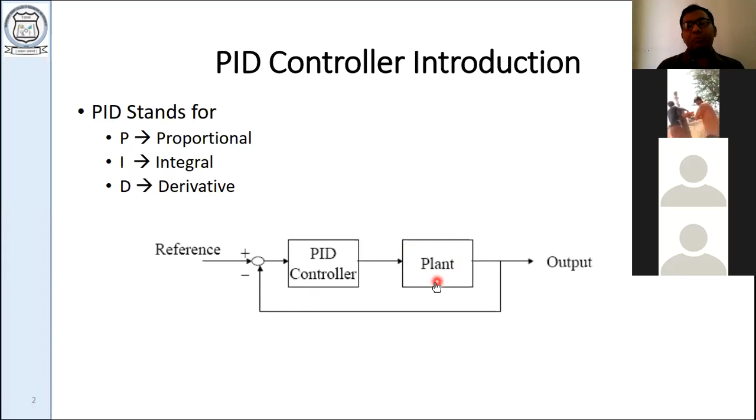And then the plant will adjust itself, or the controlled variable will be kept within the required range. This is how the basic controller works. On a similar note, PID controller will be placed before the plant, and it will try to keep the value of the controlled variable within the specified limits.

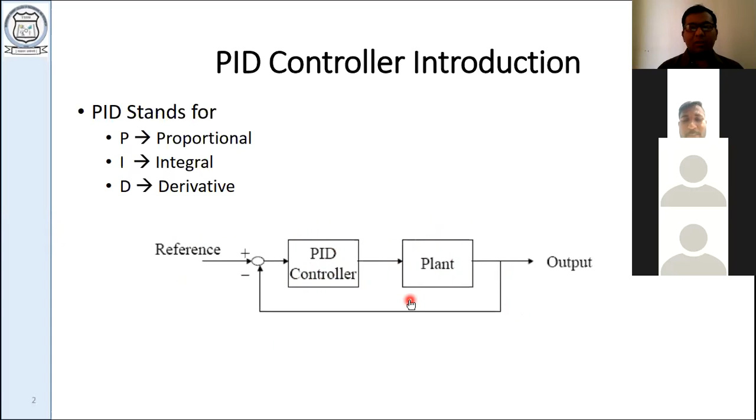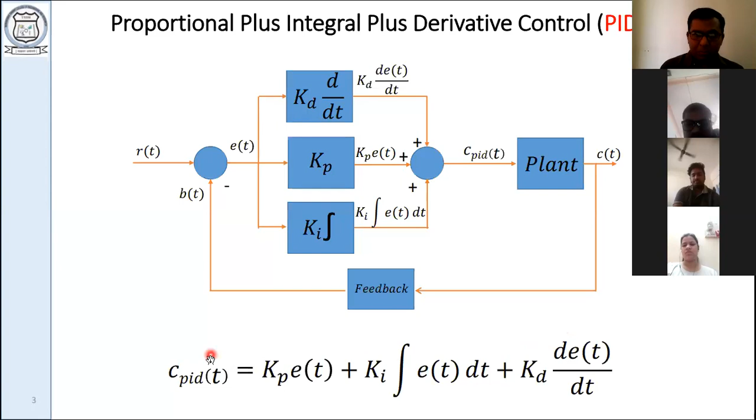Here also at the bottom you can see the output of the controller C_PID(t) is equal to Kp into e(t), which is the proportional component, plus Ki into integral of e(t) dt, which is proportional to the integration of the error, plus Kd de(t)/dt, whose output is proportional to the derivative of the error. Okay. So this is how the PID controller works, right?

Now, some of these things we will just skip ahead, because what we actually want to talk about is how the PID parameters are found out, and that is done in PID tuning, right? The process of selecting the controller parameters Kp, Ti, and Td to meet the given performance specification is known as controller tuning. A couple of methods have been proposed by Ziegler and Nichols, which suggest some rules for tuning this PID controller, and that is done experimentally.

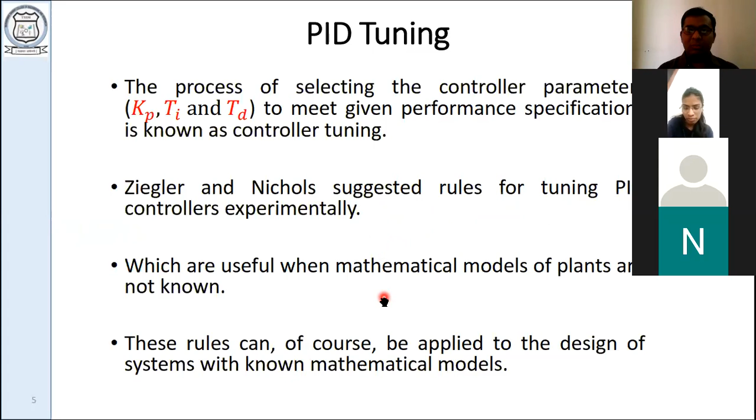That is not done analytically. Analytically means by hand or by calculations, but it is not done that way. It has to be done experimentally. So even if the mathematical model of the plant is not known, we can use these methods, and of course, if it is known, we can always use these methods, right? These will not give us final values. These will give us a good educated guess for Kp, Ti, and Td.

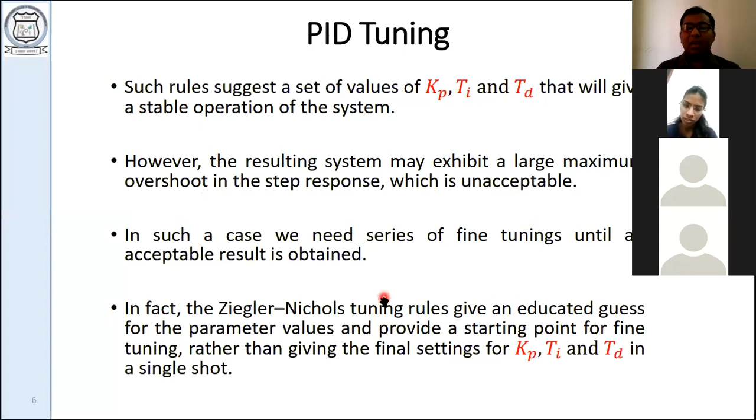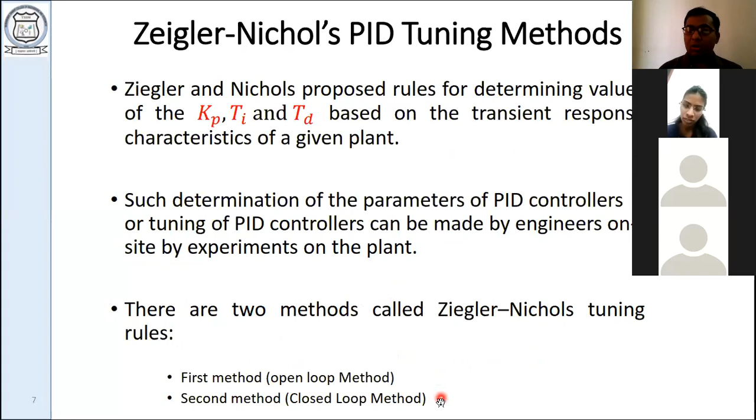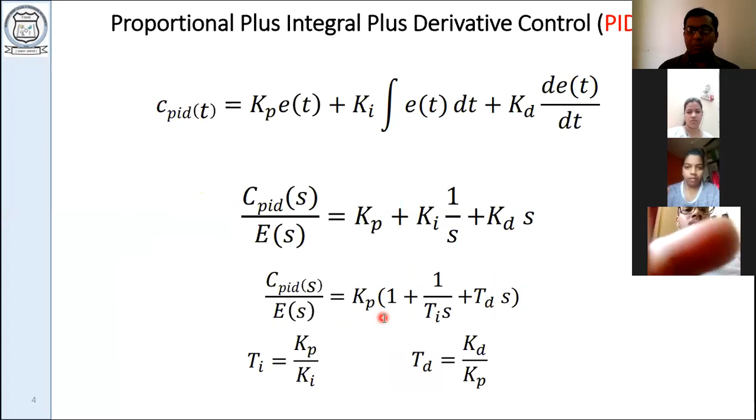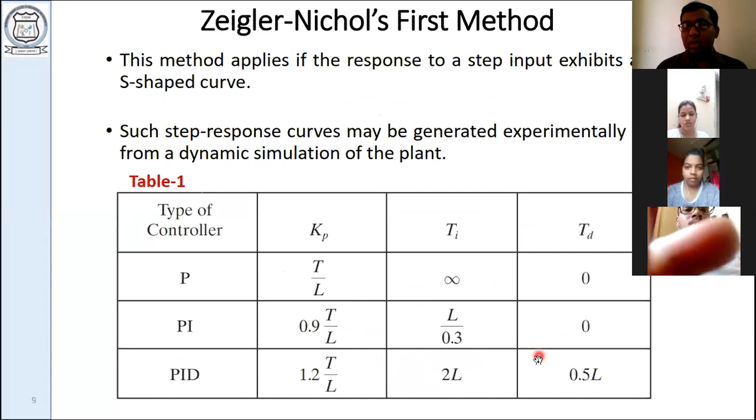Right? This is the first method, but it can be used only when there are no integrators in the plant and there are no dominant complex conjugate poles in the plant, right? These two conditions are required to use the first method. If these are not satisfied, then we have to use the second method. In the second method, we convert the PID controller into a pure proportional controller. That means we set Ti equal to infinity and Td equal to 0, so only the proportional component remains, only Kp remains.

So the diagram becomes like this. Only Kp is there. It is a proportional controller. We give it to the plant. We start increasing Kp from 0, gradually increasing its value. At some point, the plant will start exhibiting sustained oscillations. Now, what does sustained oscillations mean? Sinusoidal oscillations. It means the system becomes marginally stable, right? This we have seen twice, once at the time of root locus and also at the time of the Routh-Hurwitz criterion, right?

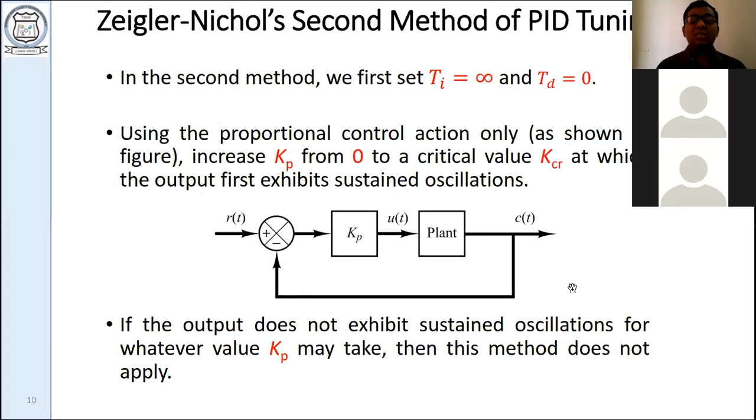We have seen Kcr, which is the critical value of the gain that makes the system marginally stable, right? Okay, so we increase Kp so that the system becomes marginally stable and exhibits sustained oscillations. Whatever the value of Kp is, we use this as one important parameter, Kcr. Now from Kcr and the sustained oscillations we have got, there will be a period of oscillations like this. These two values we capture, and based on these two values, we find out the values of Kp, Ti, and Td.

So in case of P, obviously TI and TD will be like this: TI will be infinity, TD will be 0. Only KP will remain, and for proportional control, KP will be 0.5 KCR, right? KCR is the critical gain.

For PI controller, the values change. KP will be 0.45 KCR and TI will be PCR by 1.2. For PID controller, again, the values will change. KP will be 0.6 KCR, TI will be 0.5 PCR, and TD will be 0.125 PCR.

Now, again, remember, what is this PCR? PCR is the period of sustained oscillations that we have obtained, and KCR is the critical gain that we have obtained, the gain which has made the system oscillatory. Now, this is the actual method which we have to do experimentally.

So, suppose you have a plant and you want to find out the PID tuning parameters. This is how we will do it. We will make the integral and derivative components 0 and increase only the gain, which is the remaining part. We will start increasing the gain from 0, and at one point the output will exhibit sustained oscillations. We will stop there, note down that gain as KCR, and also note down the period of sustained oscillation.

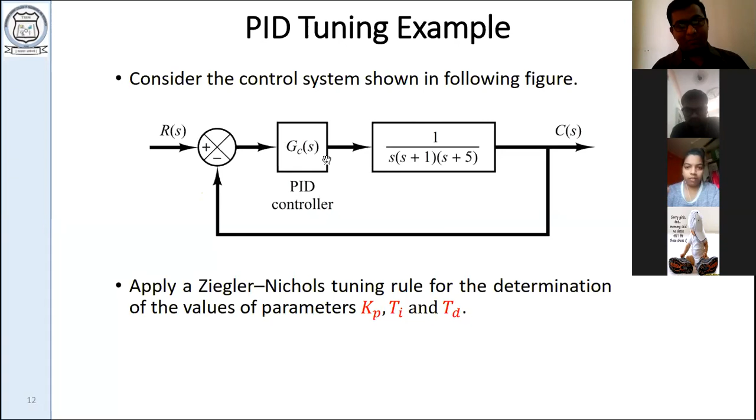Now, the second method says you will increase the gain, find out KCR, then find PCR, and then find KP, TI, TD. So how can you do this? We have to use another way of obtaining the KCR. We have the plant, and in the second method, instead of the PID, we use only KP. So the equation will be like this: KP and the plant.

So what is the closed loop transfer function of this system now? KP and the plant blocks are in series, so KP upon S into S plus 1 into S plus 5. And since it is a unity feedback loop, using our closed loop formula, G(S) upon 1 plus G(S), we get the closed loop transfer function as this.

Now, using the Routh-Hurwitz stability criterion, what can we find out? We use the denominator polynomial as the characteristic equation of the system. See here, this is the denominator polynomial, which we use as the characteristic equation, and then find out the value of K. Exactly. Then we will use the Routh-Hurwitz criteria like this.

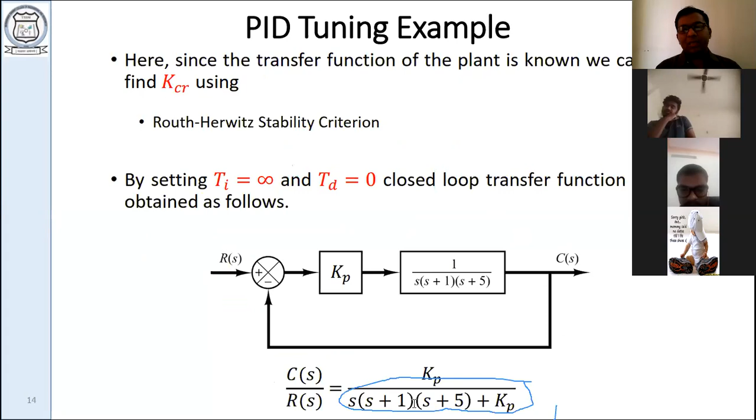This is the characteristic equation from the above equation. Here you can expand S square plus 6S plus 5 multiplied by S, giving S cube plus 6S square plus 5S plus KP. Now this is the characteristic equation. We apply the Routh-Hurwitz criteria on this and find our Routh array. So this is the Routh array now.

1, 6, 5, KP. Here we will get 30 minus KP, right? 6 into 5, 30 minus KP upon 6. And here we will get only KP, right? Correct? Now, for stability, what is the condition?

All these first column elements should be positive, or all positive or all negative, right? Now all these are positive, which means this has to be positive. So for stability, this has to be positive, and for marginal stability, this has to be 0. Because when this becomes 0, this row becomes 0, and it means the system will be marginally stable.

So we make this 0 and find out the value of KP. So 30 minus KP upon 6 is equal to 0. So 30 minus KP is equal to 0. So KP is equal to 30. From this equal to 0, if we make this equation equal to 0, what we get? KP is equal to 30.

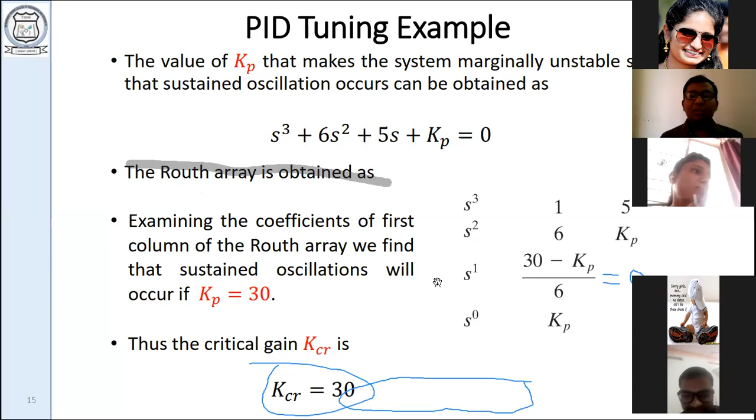So for that, we have this characteristic equation, and we will substitute s equal to j omega in this characteristic equation. And KP we will substitute as 30, and then we will find out the value of omega. Now, if I do this, j omega raised to 3, plus 6 j omega raised to 2, plus 5 j omega plus 30 equal to 0.

Now, j omega raised to 3 is, can somebody tell me? No? Minus j omega cube. How? J into j into j. J square is minus 1, into j. So minus j into omega cube. So here, that term is right here: minus j omega cube.

Here I have actually skipped one step. You can simplify this in your own way also, it doesn't matter. Minus j omega cube plus 6 into j omega square. J omega square is what? Minus omega square, right?

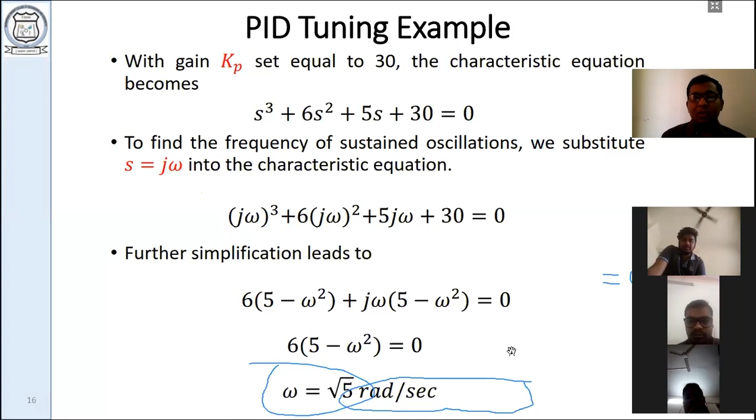So if omega is... somebody has done a lot of these things, you should clear annotation.

Okay. Omega is equal to square root of 5 radian per second. Now what actually we wanted was PCR, which is the period of sustained oscillation. So that will be equal to 2 pi by omega. We want PCR in seconds. How we are getting this? Omega is equal to 2 pi f, frequency in hertz. So f is equal to 1 by t. That's why t is equal to 2 pi by omega. So we'll get this value as PCR.

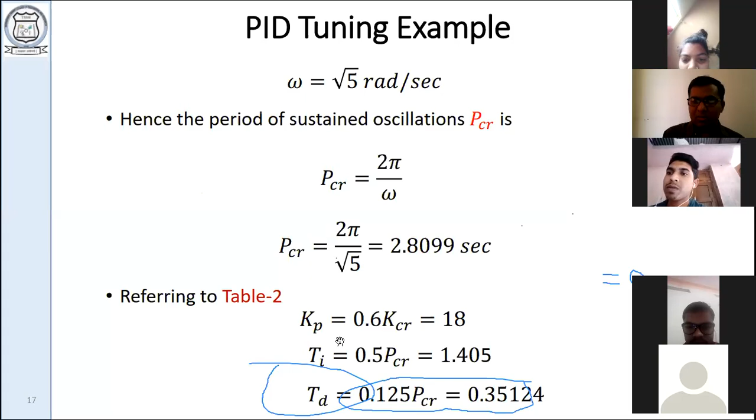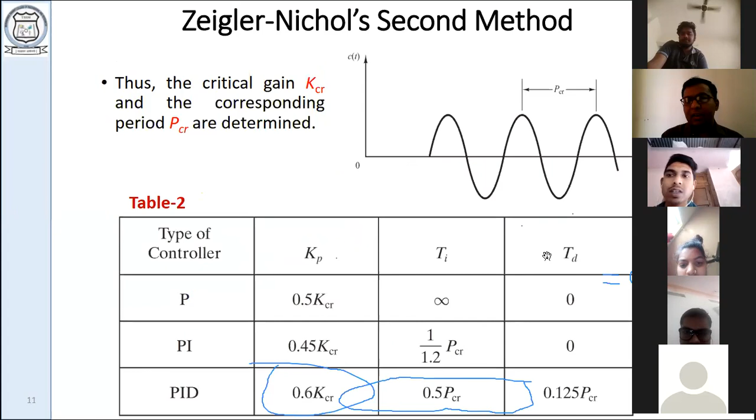So now from the table that we have already seen, Kp is equal to 0.6 KCR, Ti is equal to 0.5 PCR, and Td is equal to 0.125 PCR. Which table I am referring to? I am referring to this table, number 2, closed loop PID. Kp, Ti, and Td we are getting here. This table you have to remember all the time.

Okay, so we have got KCR which was equal to 30 and PCR which is equal to 2.8099. So using these two values, we will find out the three values of Kp, Ti, and Td. Ideally, if the problem expects to find out Kp, Ti, Td only, then we can end the problem here. But if it is asked to find out the transfer function, then the additional step is you just substitute those values in the transfer function equation and you get your answer.

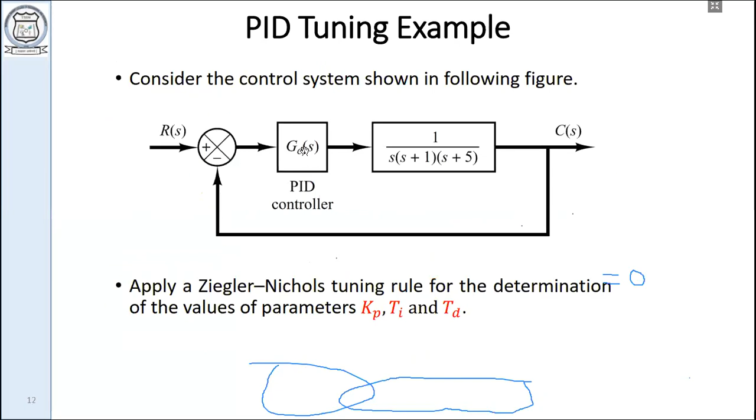So this is what the GC is. GC means the transfer function of the controller only, not the transfer function of the full closed loop system. So what will be the final diagram if you want to see? The actual diagram is like this. In this case, we have found out GC. So if it is asked to draw the full diagram of the control system, then just write that equation in this block and it will be complete. Normally it is not asked. Generally, what is asked is to find out the values of Kp, Ti, and Td.

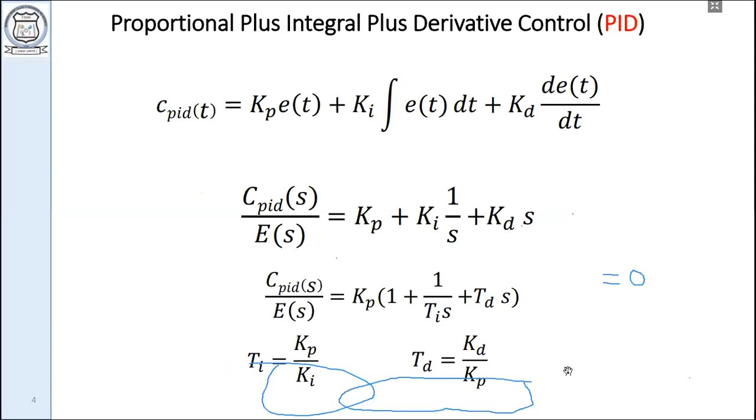In some cases, you may be asked to find out Kp, Ki, and Kd. What is the difference? Here we have done Kp, Ti, Td. So what you will have to do in that case? You will have to remember this equation: Ti is equal to Kp upon Ki and Td is equal to Kd upon Kp. From these relationships, you will have to find out the values. We have found out Kp, Ti, Td, and if you want Ki, then Ki will be equal to Kp upon Ti. Kd will be Td into Kp. So this way you can also find out Kp, Ki, and Kd.

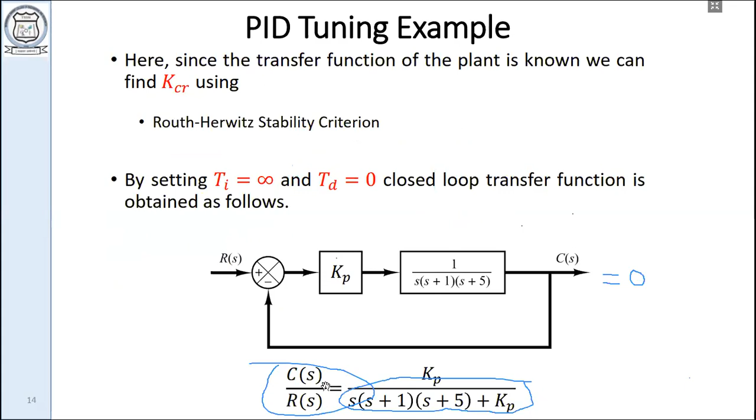So this kind of problem normally is asked for 8 marks in your exam. It is very simple to remember, and the only important thing we have done is to find out the value of Kp using the Routh-Hurwitz criterion. And before applying the Routh-Hurwitz criteria, we must find out the characteristic equation. So here is the big step. You write down Kp here, Kp multiplies here, and you have to first find out the closed loop transfer function of the system, and on that you will apply the Routh-Hurwitz criteria. This is one of the most important steps which you should not miss, because once you do this, you get Kp by equating this kind of term to 0, and then you find out your

KCR and omega n. For finding out omega n, you can do another step also. Can somebody say which one? Auxiliary equation. Exactly. You can find out the auxiliary polynomial from here: 6s square plus Kp, that is 6s square plus 30. You will anyway get the same value. 6s square plus 30, so s square is equal to minus 5.

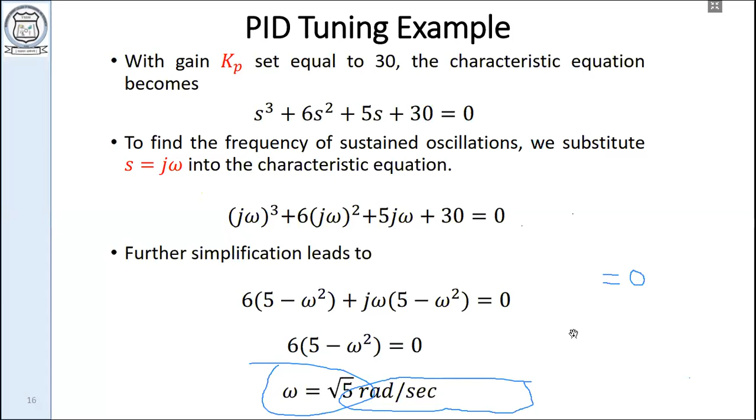Right? So you are going to get the same thing. Omega n is equal to square root of 5. Yes. This is what we have done at the time of root locus, Routh array. From the Routh array, we have done this for the root locus, where the point of intersection is with the imaginary axis. For that, we have done the same thing, right? So that also we can do. We can find out the omega n.

And omega n, remember, omega n is in radians per second. And what we want in terms of PCR is in terms of seconds. Right? Omega is equal to 2 pi f. That basic equation: omega is what? Omega is the frequency in radians per second, and f is what? Frequency in hertz. Yes. So omega is equal to 2 pi f. That equation you should remember. Using that equation only, we are getting this.

Right? PCR is the period of oscillation. So f is what? 1 upon PCR. Right? f is 1 upon PCR. Am I right? 1 upon f is equal to PCR. Yes. This is period, this is frequency. When we are talking about this frequency, it is in hertz. This is hertz, this is seconds. Okay. Anyway, all these things will add up.

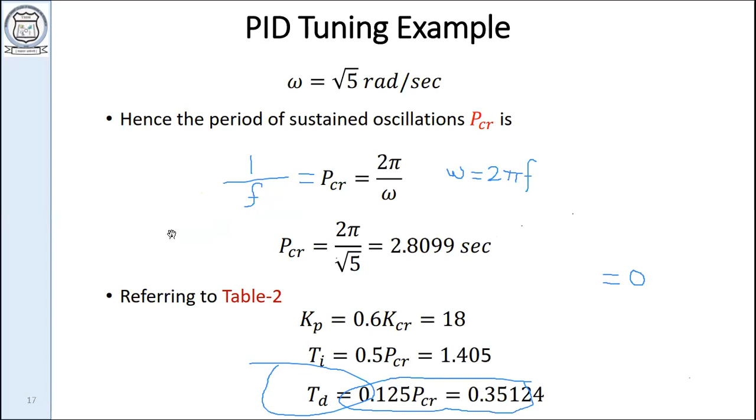What we have? We have omega is equal to 2 pi f. Right? So we are using this same equation to find out f, and f is equal to 1 upon PCR. So this is how we get PCR is equal to 2 pi by omega. Okay. So any doubts regarding this point? No, sir. Yes, it is clear to everyone.

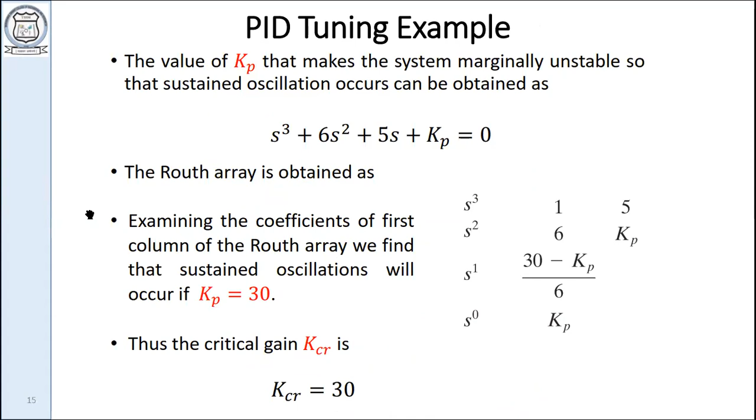And is there a problem regarding the first step or first method? First method. Okay. The first method is this method you are talking about, right? Yes. You may ask. What is the problem? Sir, can we take a problem on the first method? Actually, we cannot solve any problem on the first method. If you see what the first method does, we have to get the output of the step response, right?

You are saying if there is a problem in the exam, right? It is not possible to get a problem on this first method, because in the first method we have to apply a step input, get the step response, and then find a tangent. This we cannot do on paper. Are you getting the point? Because this is applicable when the mathematical model is not known. This method I have covered just for the sake of completeness.

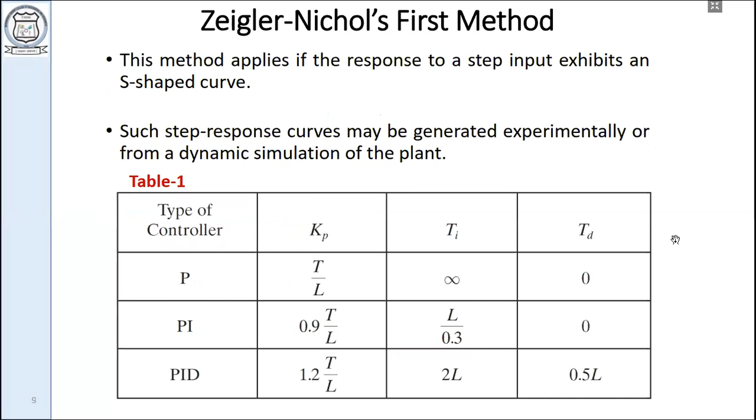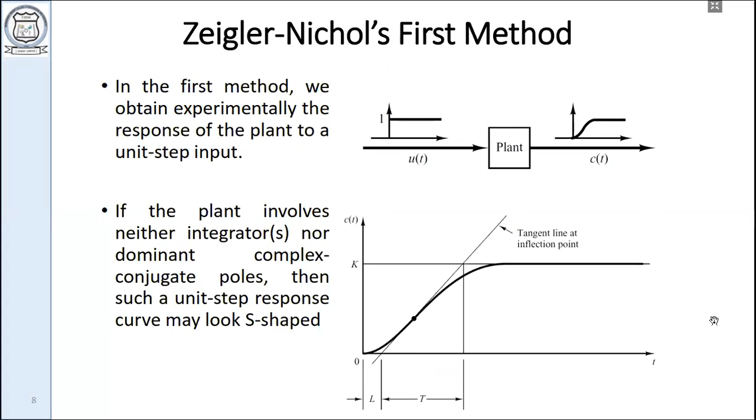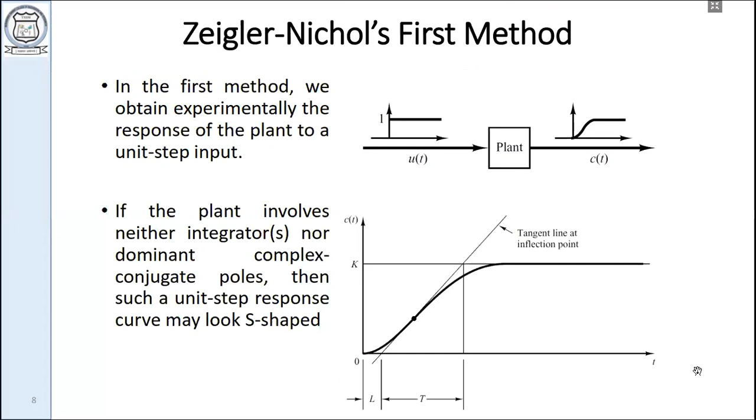If at all there is something, you will be given a curve, and L and T will be given to you. From that, you will have to just make these calculations. But this kind of problem is not possible on paper. Okay? These tables you must remember. Basically the second method table is important; this you must remember completely. Yes, sir.

Somebody is talking, but I cannot hear.